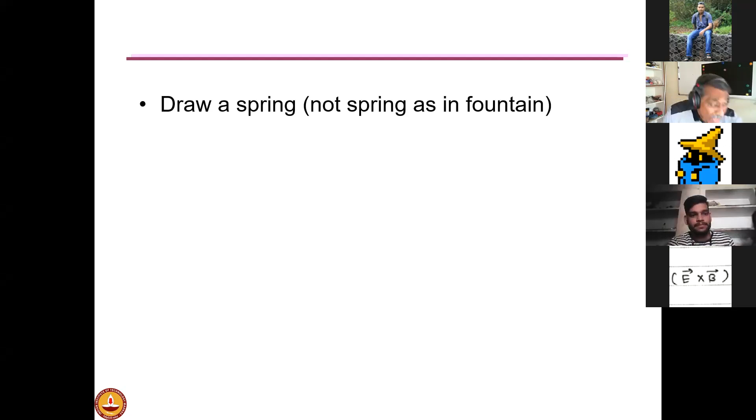So everything around us is a spring. Our glasses are a spring, our bangles are a spring, our shoes are a spring, hairpin is a spring, door stopper is a spring, right? The table is a spring. The cables that are running for the elevator are a spring. Even the weights are springs.

Screwdriver is also a spring. Just think of the screwdriver as something which becomes a little softer. What will you see? As you twist it, between that end and this end, you are able to twist it, which means you are able to store some energy. And if you leave it, it comes back. Right?

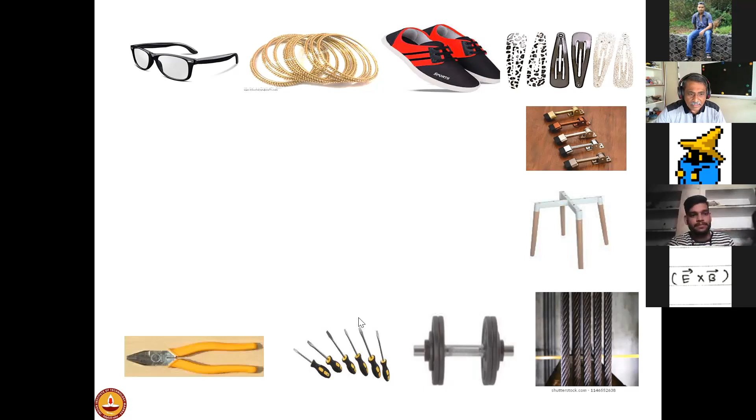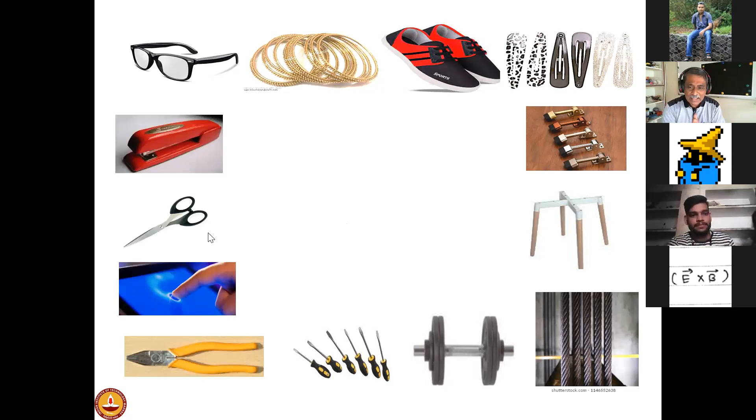Even a cutting plier has to be a spring. A touch screen has to be a spring. It comes back. Right? Everywhere there is a springing back. Even your stapler is a springing back thing. And therefore, now suddenly you see springs everywhere, right? All it has to have is a deformation that can come back. And in nature, in reality, almost 99.99999% of the things come back.

One of them is asking about clay. I'll show you. This is clay. What's your name? Karthik. This is clay, okay? I'm bending a little bit and leaving. Just watch it carefully. I'm pressing it a little bit and leaving. I'm bending it a little bit and leaving. Can you see it coming back? Slightly. It may not be too much, right? And when it bounced, you were able to clearly see that it was springing back.

Okay, so everywhere, whatever we are seeing, there is some springiness attached to every real object. Yes, some of them don't spring as much as the others, the degree of springing varies, but springs are there everywhere. I want you to realize this. This is a very important point that I'm making. Springs are there everywhere. So this gives me an idea: if springs are everywhere, if I understand springs, I'll be able to understand how all these operate, how to design, etc. That's the point I'm making now.

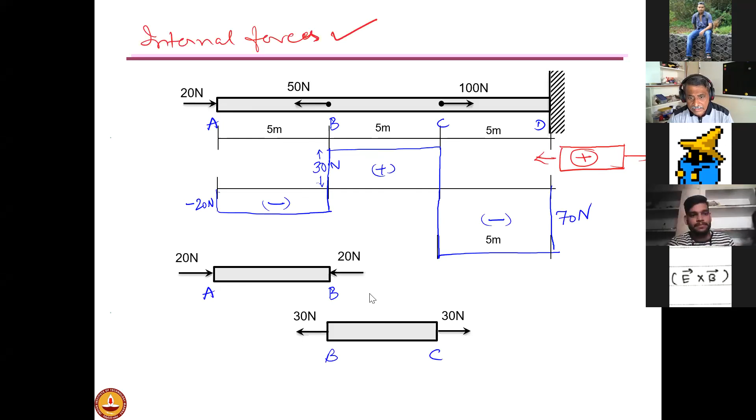And if I take only this bar, I see that it is under compression, right? If I take only the BC bar, it is under tension. 30 Newton, how did I get it? Because 30 Newton is the internal force that I can see over here. Similarly, here it is 20 Newton. This bar CD should have 70 Newton. Is it compression or tension? Negative, which means compression. So I have one bar under compression, one bar in tension, one bar in compression. So far, okay? All right.

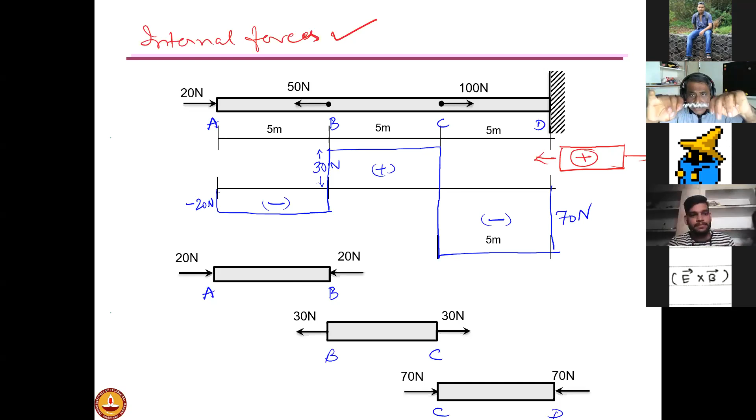So in compression, in tension. Okay. Now, forces in each bar I am able to find out very easily, no problem. Let's move on. Okay. Now, what I'm going to do is instead of this 50, I'll make it 25, 25, 50, 50 here. It doesn't make a difference, correct? Yes or no? Yeah. 1 second.

Let me just have the chat box ready so that, yeah, very small displacement. You're right, Karthik. Now, by making it 25, 25 and pulling parallelly, it does not really matter. Don't write on mine, please, though I've given you permission.

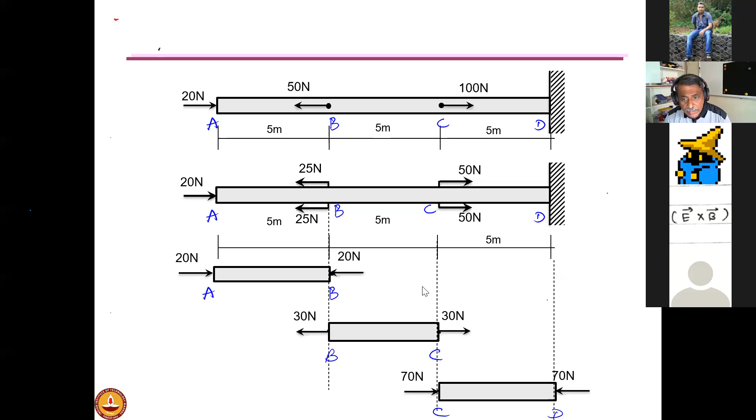All right. Now the thing is, in this, supposing I replace these bars by individual springs AB, BC, CD, will it make a difference? After all, we understood that even if I take a bar, the bar in tension and compression can be thought of as a spring, is it not? So this is a spring AB, this is a spring BC, this is a spring CD without any loss of understanding.

Why, Karthik, you're saying no? Rishabh also is saying no. Why can't I replace? It's the same internal forces that I'll get, right? No, sir, I meant you can replace, there's no difference. There's no, okay, that's why he said no. All right. Yes, sir. Thank you, Karthik. I don't know who is talking. Rishabh. Yes, thank you.

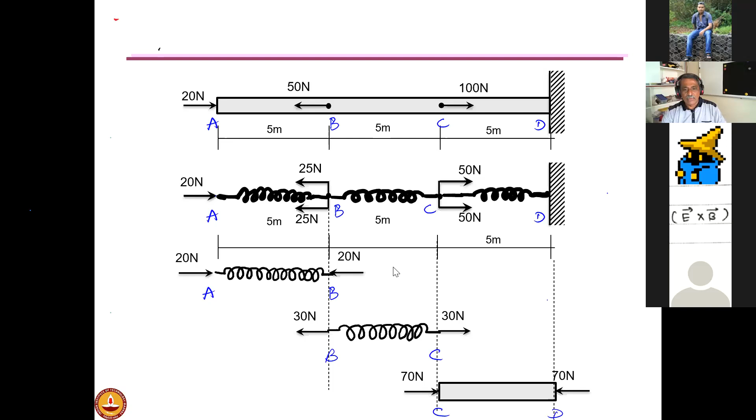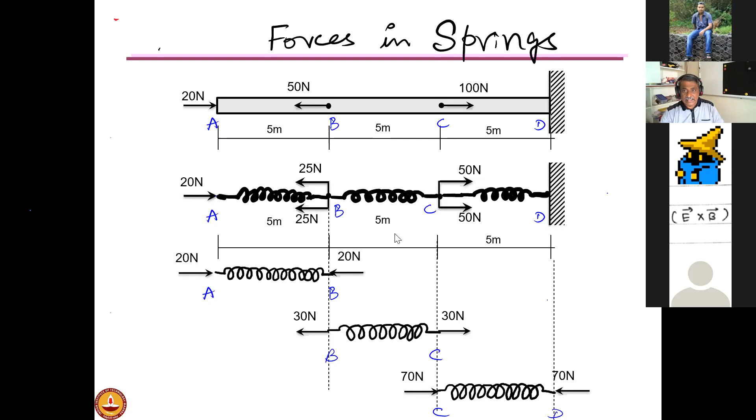Now, coming back, I'm going to now change it to this kind of a thing. So instead of looking at them as bars, I'm going to now look at them as springs. No difference whatsoever, right? I can maintain whatever I have done earlier, but now I'm going to call this as forces in springs. So let me now think of all these as springs and then do the next exercise. Listen to me carefully as far as the next exercise is concerned.

How do I come out of this? Give me a second. I'll just come out of this. Let me share the screen again. Are you able to see this now?

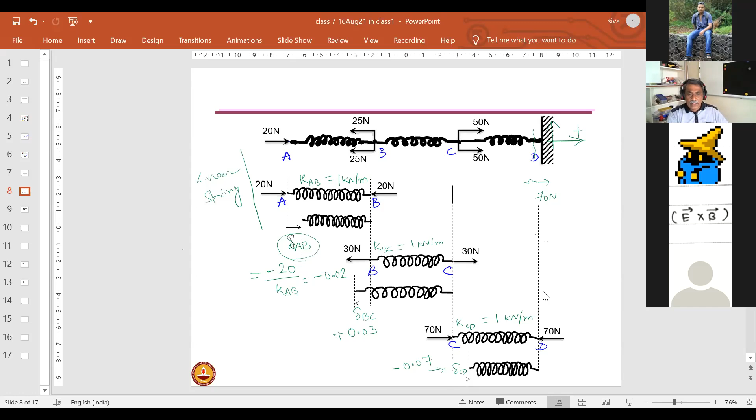So if I use, let's say, a sign convention over here, let's say this direction is positive, then this is a positive value. So I'm going to say displacement of A with respect to B is equal to 0.02. Whenever you have a difficulty, you should ask me, okay? Remember, displacement of A with respect to B using this sign convention.

Let's say this is along the I direction, this is along the J direction. I can put this as I over here. So let me do that and see what happens here. This I already have 0.02, right? Let me take this as I. This is J. So this is 0.02 I, right? This is in the other direction. What is this? This is U of A with respect to B, right?

And what I'm going to show you here is U of B with respect to C, and that is 0.03. In what direction? It's in the other direction. So it is minus I. And similarly, this is U of C with respect to D, and U of D I know is equal to 0. Okay, so far so good. What is this equal to? This is equal to 0.07 I in the direction that is shown. Now I have the relative displacements of each one of them. Now I can use geometry and get.

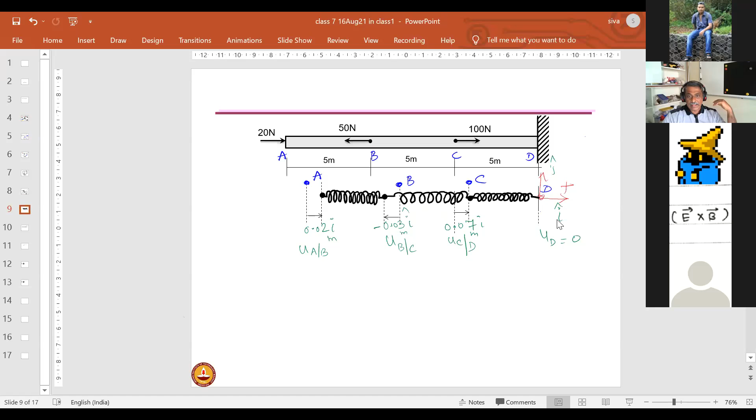Chaitanya, are you able to understand it now? The displacement of this point. Okay, go to the previous slide. So look at this. This spring alone has compressed by delta AB. What does it mean? Relative to B, this should move like this, right? That's what I've shown over here. I've not moved B. I've just made sure that B is the same and moved only A.

Only cursor, right. Now what I'm saying is this spring has gotten compressed, is it not? And if you look at it carefully, I have not disturbed B, which means A should now move to this point. Is it not? And therefore, that's what I'm calling the elongation.

Cursor is stationary, I see. Oh God, how many of you can see it moving now? I'm moving the cursor. Or the screen is stuck. So we can't see, like, now it's moving. Okay, let me do it again. It may be because of the bandwidth that I have. How about now? Are you able to see? 1 second. Are you able to see the cursor now? Yes, sir. Okay, fine. Thank you.

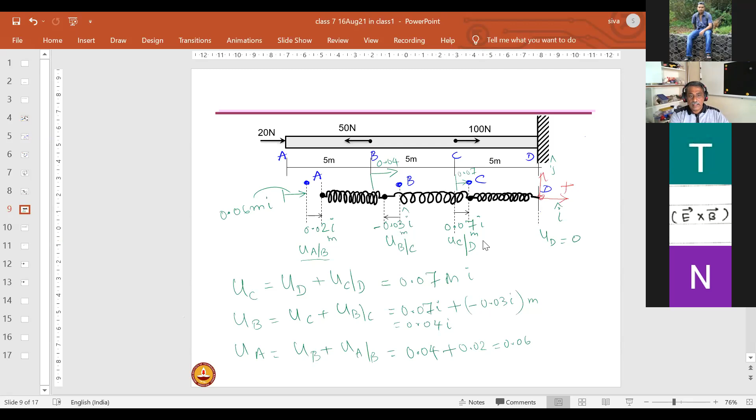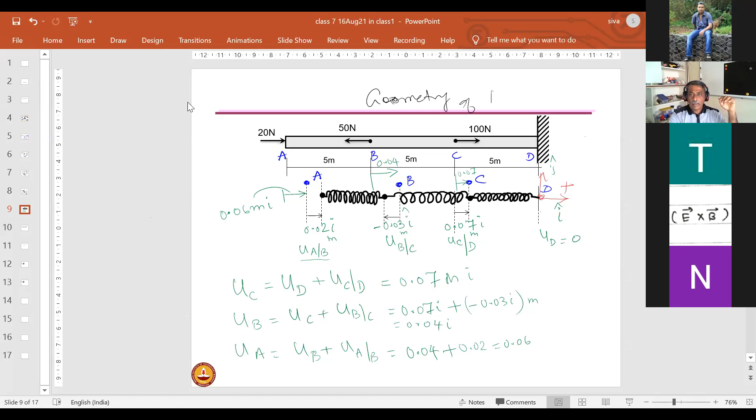Are you with me? This is basically the geometry of deformation. So I'm going to call this as geometry of deformation. Let me use these here. So for strength of materials, this is GoD. So far, okay? Is this clear?

I just used the fact that this point connecting these two springs is one and the same. This point C connecting BC and CD are one and the same. I use that fact over here in order to be able to arrive at how much movement has occurred for each of these points A, B, and C. And therefore, I call it as geometry of deformation or displacements if it is in engineering mechanics. Here, since deformation has occurred, I'm using deformation. So that is God for you in SOM.

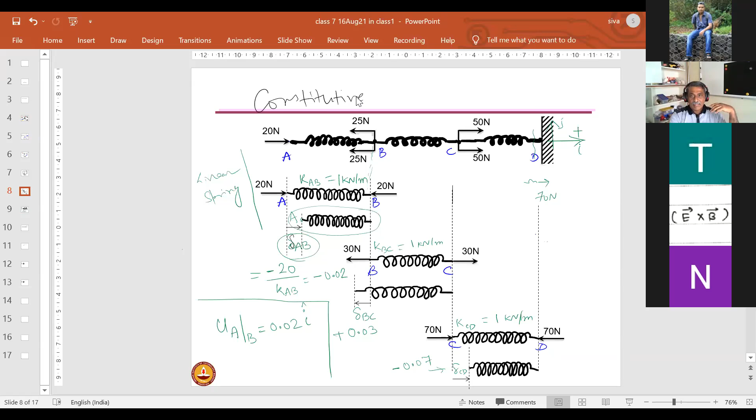What is this then? This is the constitutive property of the spring, right? Of the material of the spring. Right? So I'm going to use CO and P and tell you that this is the cop which is watching over, oh, okay, which material? I should use that material appropriately.

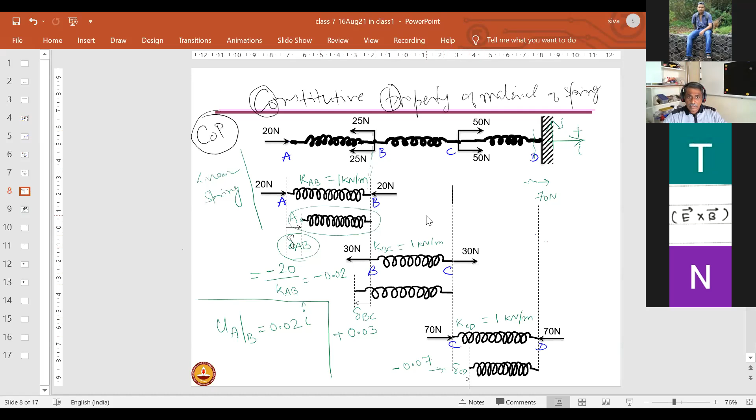So what did we do? I'm just going to go back. We first found out forces in springs. Then we used the constitutive property of these springs, right? And then we used the geometry of deformation, and putting them all together, I was able to now find out how much movement has occurred for each of these points.

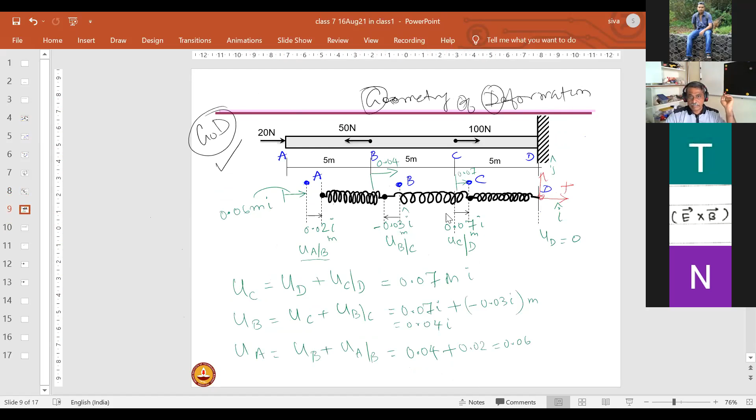Okay. So in other words, in order to get the internal forces, I have used equations of equilibrium, right? Remember the first slide. Then I used constitutive property of the springs. And finally, I used geometry of deformation in order to find out the displacements of those connected points. Okay. Any questions? Let me stop here, ask you for questions before going ahead. Any questions so far?

So if I take a spring, and I pull with the force, let's say F here, and it deforms by a certain extent, let's say that is 0.1 meters. I take another spring, and I pull with the same force, and this moves by 0.2 meters. Which one is stiffer? The first one is stiffer. The reason is it has moved little, right?

Or in other words, the stiffness property is associated with force per unit elongation. Okay. So if I have to find out the stiffness of the spring, all I have to ask is, what is the force that I have to apply so that this elongates by a unit length, whatever be the unit. You know this, I'm just repeating some of these because this will help me seamlessly go to the next step when we have continuous elements. So let me proceed further since you don't have any questions.

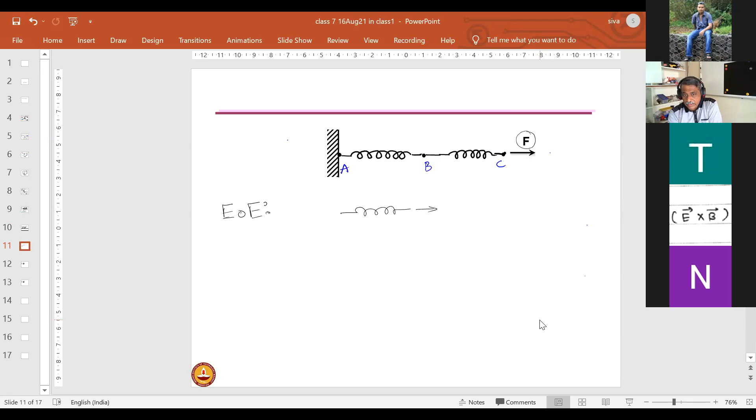The force F, if I look at this spring or this spring, both the springs are subjected to the same force F. Can you catch it immediately? So this is AB. Similarly here, I can state that BC is also going through the same internal force F.

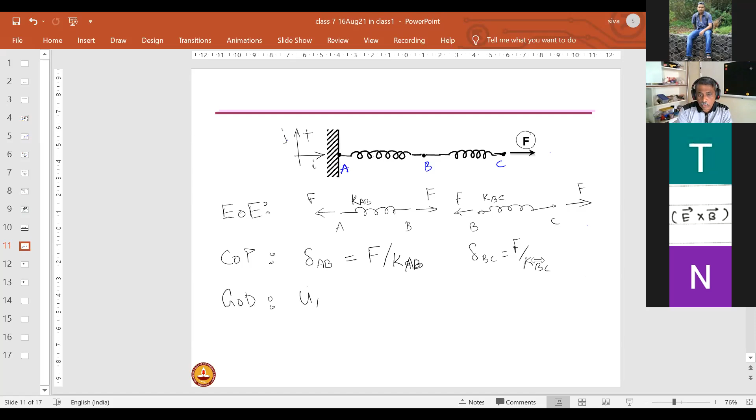Folks, one more thing that you notice here is I have not done a few things over here. So let me do that now. Let's say this is the absolute coordinate system. This is the positive sense. This is I, this is J. Now I can state that in the GOD, which is the geometry of displacement, UA is equal to 0. U of B with respect to A is equal to delta AB. Which direction? Along the I direction, correct? Similarly, U of C with respect to B is equal to delta BC along the I direction.

In this case, both of them are moving in the same direction, so therefore positive. So what would be the displacement of C? That's the question I'm asking. That's very simple. It is nothing but U of A plus U of B plus U of C with respect to B. Am I right? Yes or no? If you say yes, fine. If you say no, you have to tell me why. I made a mistake here. One of you, fast. I made one mistake over here.

Okay, let's do it methodically. U of B is equal to U of A plus U of B with respect to A, which means this is 0. This is U of B with respect to A. And U of C is equal to U of B plus U of C with respect to B, right? And if I put this over here, I will get this to be U of B with respect to A plus U of C with respect to B. So what mistake have I done here? I should have put it like this. Are you with me now? Okay. I know it is very simple. I'm just telling you how methodically I'm going ahead with this.

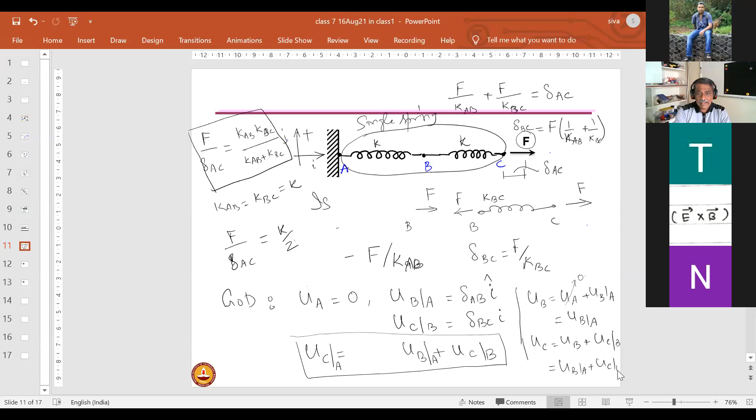For example, if KAB is equal to KBC, let's say equal to K, what do I get? F by delta AC now happens to be K squared over 2K, so I'll get this to be K by 2. The original springs have stiffness K each. When they are in series, their stiffness reduces. In fact, in this particular case, it has become half. Okay, what is this? This is the stiffness of AC.

Simple, no? So now, if two springs are given to be in series, I'll be able to find out what would be the net stiffness of the two springs combined together. Okay. Now, 10 minutes into your breakout room.

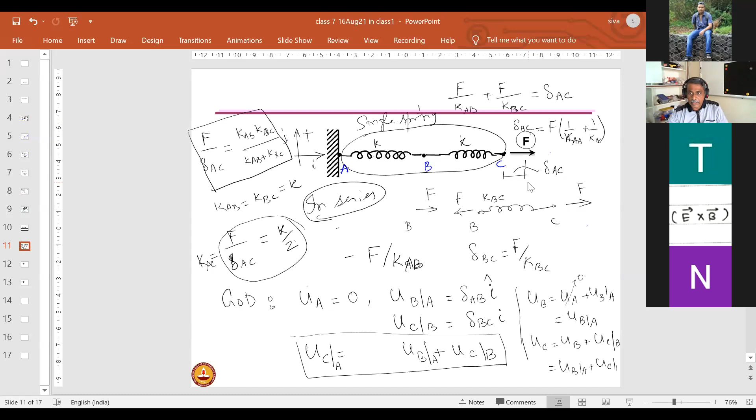How about this? I'll make it simple here. I'm going to make this just K here, K here. I want you to go methodically. Let me start the breakout room. Before that, let me show this diagram to all of you so that you can use it.

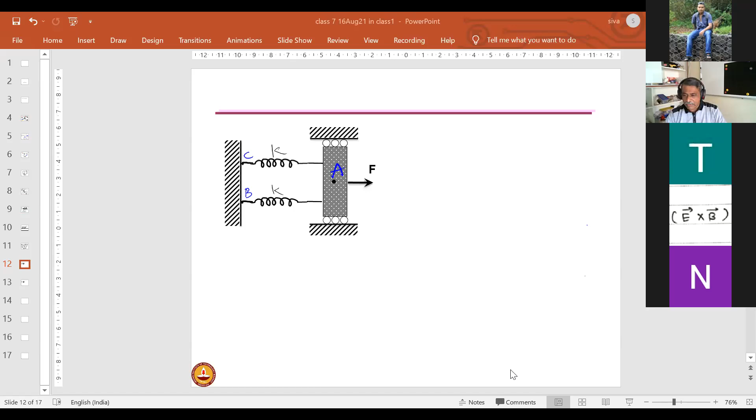Let's see. My computer, quick access. Working problem. Okay. So I put that as a PDF file if you want to see it in the breakout room. Please, I have only 5 minutes, so not more than 5 minutes and then come back. Breakout rooms. I'm giving you 5 minutes. Start. Use the working problem that has been given here. It shouldn't take more than a minute if you're already there. Please go fast to your breakout room.

Sandeep, tell Vinay Kumar to move. Vinay, have you not been assigned any room? Hello, sir. Did you say something, sir? Ria, why are you waiting here? You're supposed to go to the breakout room. Aditya, Sandeep, let me just go to each of those rooms and check out how it is going. Okay.

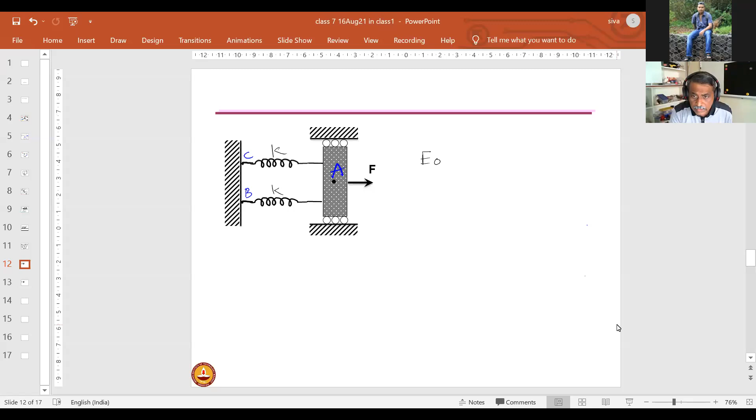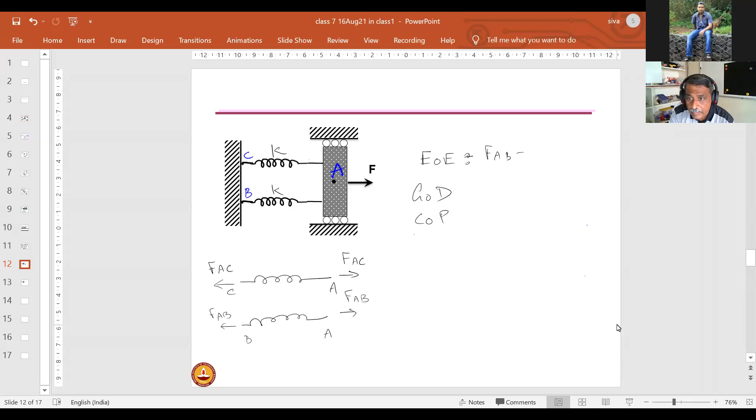Now, one thing that I have to do now is EOE, GOD, and COP. In EOE, equation of equilibrium, I don't know the force in this member, so I'm going to draw that separately. This is CA. Let's say this is FAC. I'm going to assume that it is in tension. This is AB. This is FAB. Equilibrium tells me FAB plus FAC is equal to F.

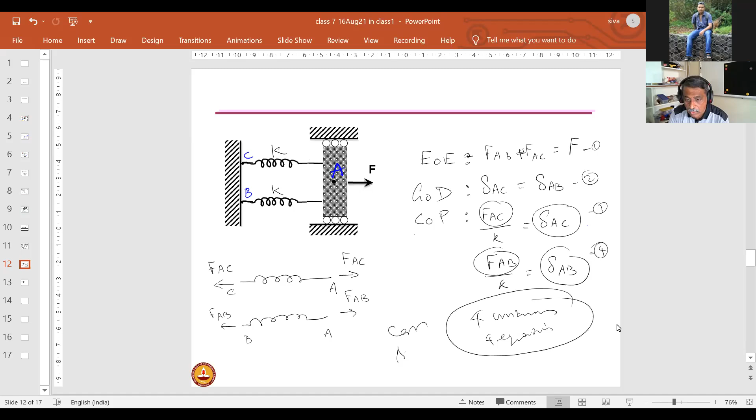Geometry of deformation tells me that delta AC is equal to delta AB. COP is the same: FAC by K is equal to delta AC, FAB by K equals delta AB. Delta AC, delta AB, FAC, FAB are unknowns. 4 unknowns, and I have 4 equations, so I can solve. I'll give this as homework to you. You will find that for springs in parallel, the net stiffness is the addition of the stiffness of the individual springs. Let's do the problem and get it right before we meet tomorrow.